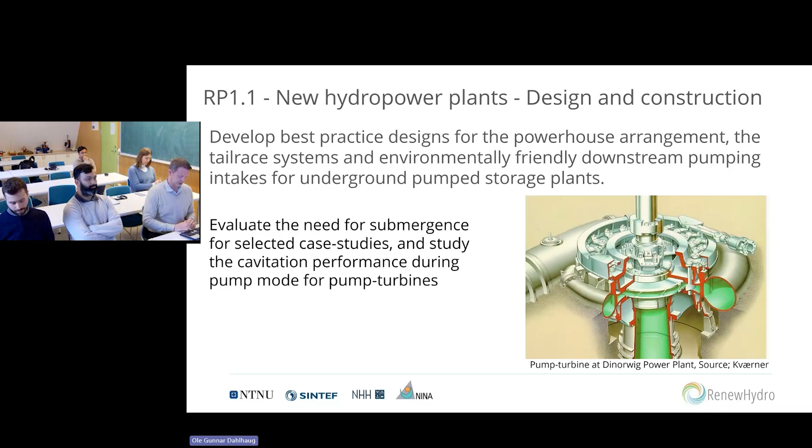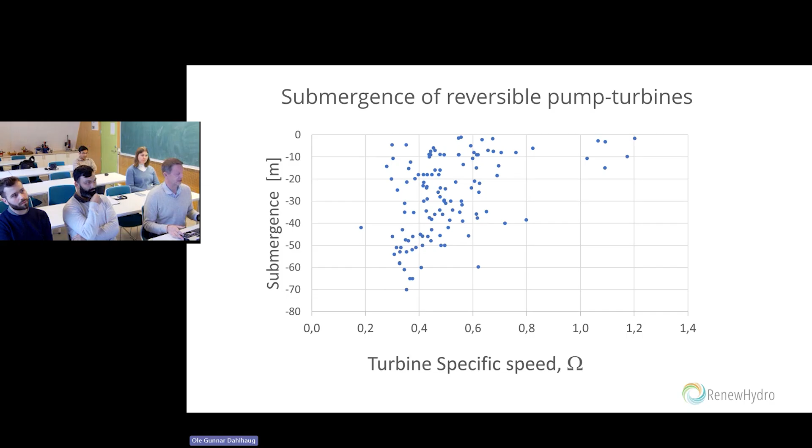That's a big question. Here to give you an introduction, these are different pump turbines around the world with different submergence. You see submergence down to 70 meters being utilized today, from just a few meters down to 70 meters. New pump turbines are coming with fairly large submergence, and if we can reduce that submergence, the cost will also be reduced quite a lot.

We are looking into the Sira Kvina Hydropower system and Tonstad as a case study. Tonstad, or Sira Kvina, is going to look into the possibility of building a new pump turbine from Sirdalsvatn up to Gravatn, with a fairly large power output. This is one of the cases we will look into in this project, and it's great that they are giving us all the information from that power plant. It's a nice thing being in RenewHydro that can give us access to data about these things.

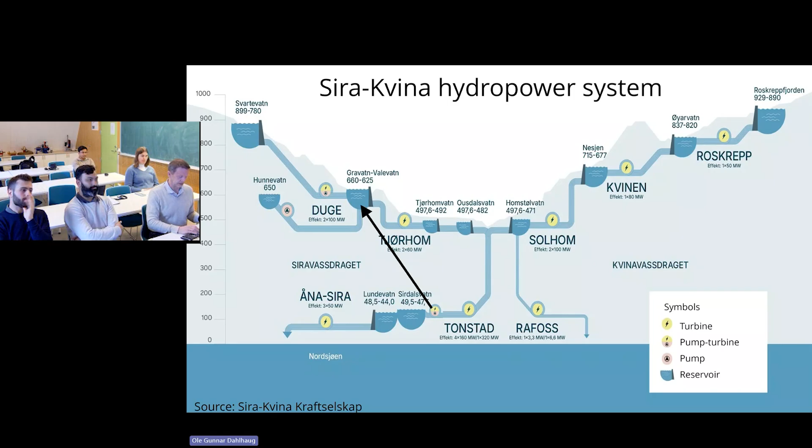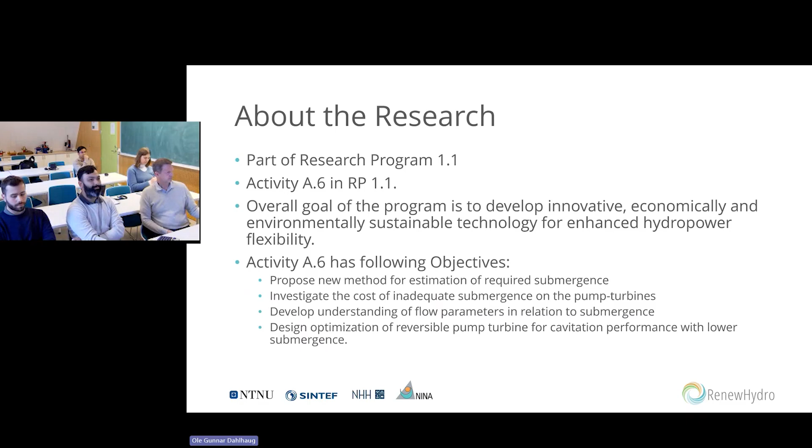Hello, I'm Amul Ghimire. I'm a PhD candidate here, as Ula introduced, and I am working on the topic of submergence of reversible pump turbines. This is, as already introduced, under research program 1.1, activity A6 within that research program. The main objective is to find the possibilities for reducing submergence of reversible pump turbines. I will be talking about what this means and how it is a big topic right now.

First we have to talk a little bit about cavitation, basically defining it. It's a way of when water changes its phase from liquid to vapor because of a drop in pressure at a given temperature, then we can call it cavitation. It is not a new topic, it's been around for many years. It was first coined by Froude, who found it on ship propellers, and it was in 1895 that it was first introduced to the world, and it's still a big problem in hydraulic machines in daily operations.

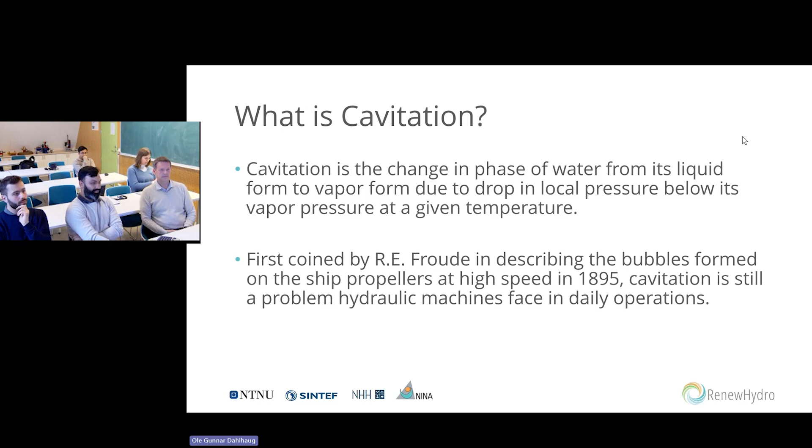To define it and understand it a bit more, we have to understand the boiling of water, because cavitation is basically boiling of water at room temperature. When you are boiling water at sea level, where the pressure is 1 atmospheric pressure, around 100 kilopascals, you boil water at around 100 degrees Celsius. But if you go up several hundred meters into the mountains, the water will start boiling at much lower temperatures.

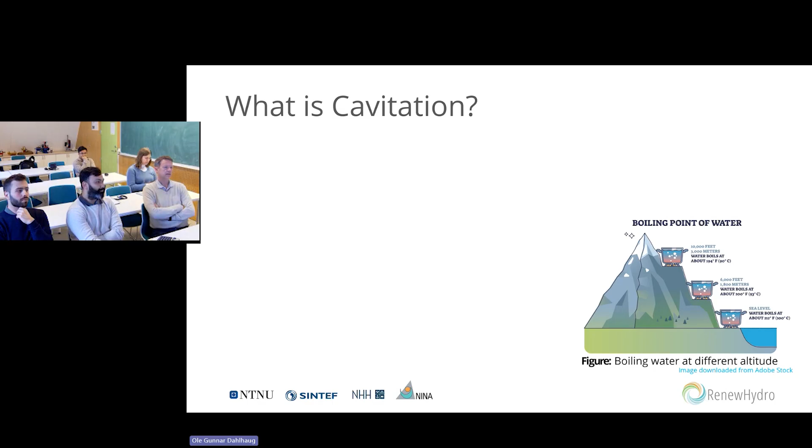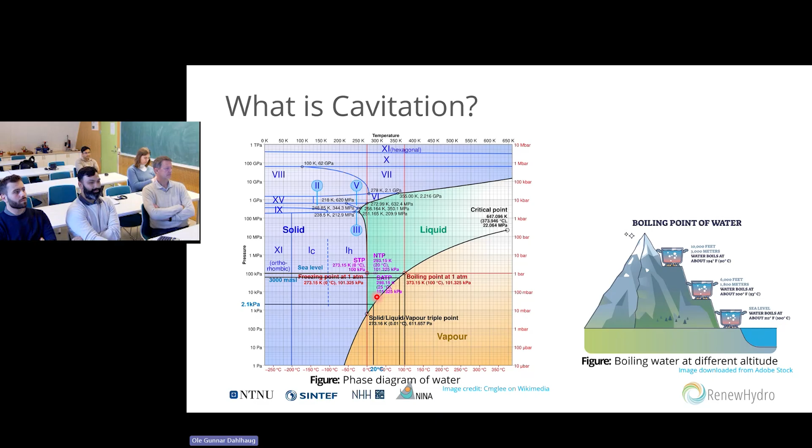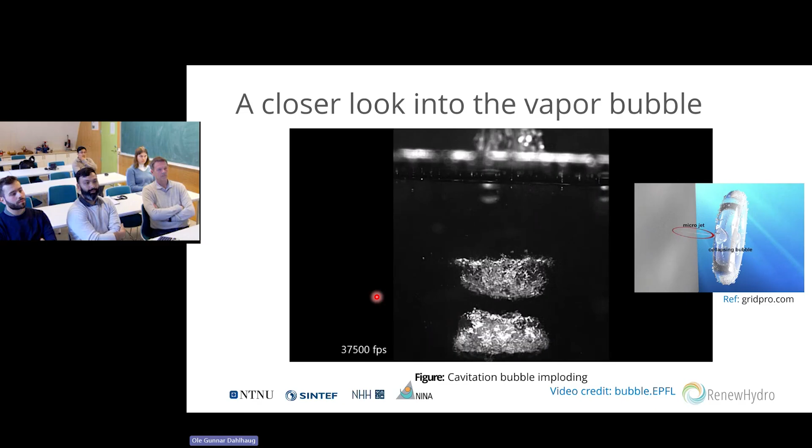So it's both the jet and the shock waves that hit your surfaces. In our case, it's the turbine surface, blade surfaces, which causes damage to the turbines, which is why cavitation is something we need to consider while designing.

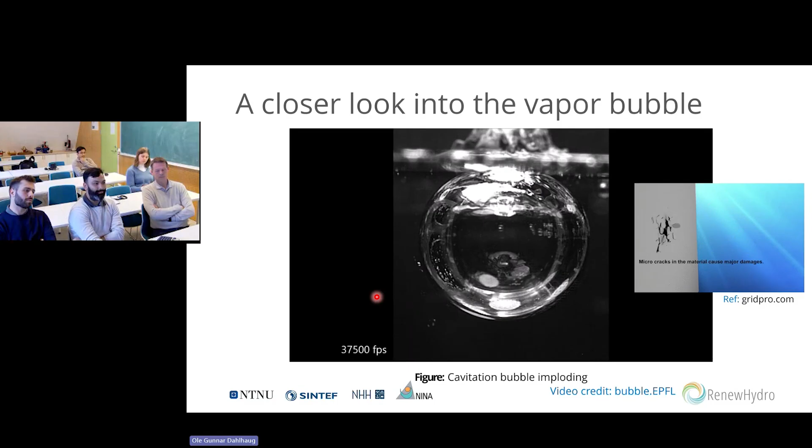Going into the turbines now, cavitation happens when the pressure is very low. In a turbine, the pressure can go very low when the flow is disturbed and when there is flow separation, and flow separation happens when there are obstructions on the flow.

It's all right, yeah. So we will look at this later as well.

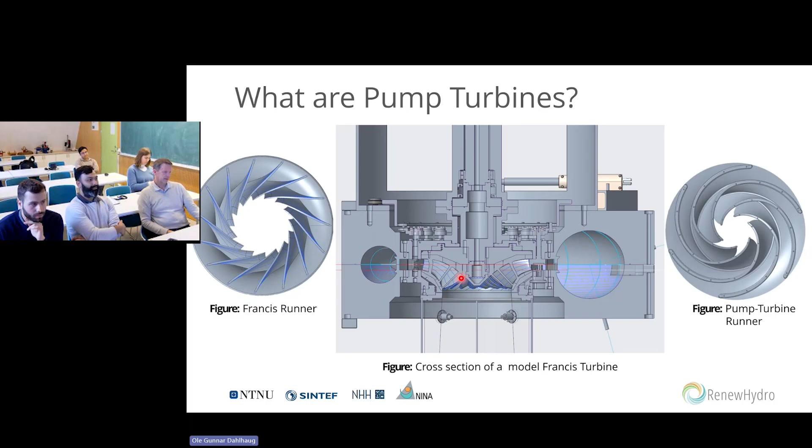Now going into pump turbines: these are basically just Francis turbines, which have a runner that looks more like a pump, and it's designed to operate both as a pump and as a turbine, such that it can pump water back up to its upper reservoir. For example, if you were to operate the Francis turbine as a pump, it will pump up water, but not all the way up to the same height that you would actually want your upper reservoir level to be.

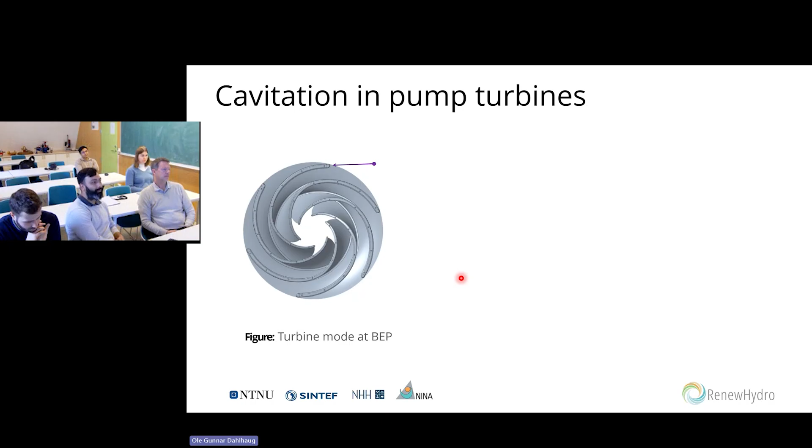Talking about cavitation - I couldn't show you a video before, but what happens is at the best efficiency point in turbine mode, the relative velocity of the water flows aligned with the shape of the blade at the inlet. If, for example, we're looking at high flow, this relative velocity will not be aligned in the same way, and it will be hitting the blade a bit offset. Because of this, you'll see flow separation on the opposite side of the blade.

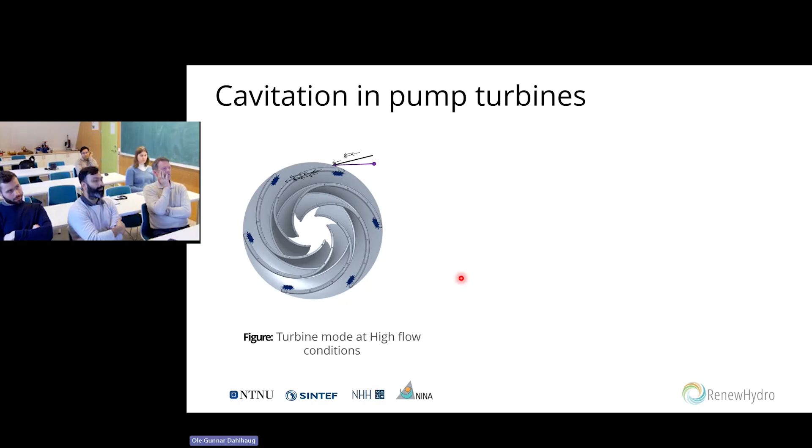And when there is flow separation, there is a pressure drop, and when there is a pressure drop, there is a possibility you could go into the cavitation region of water at that temperature. We did this test in the lab and saw that when operating at a low enough head and with really low suction pressure at the suction side, we cavitated at the inlet of the turbine itself in turbine mode.

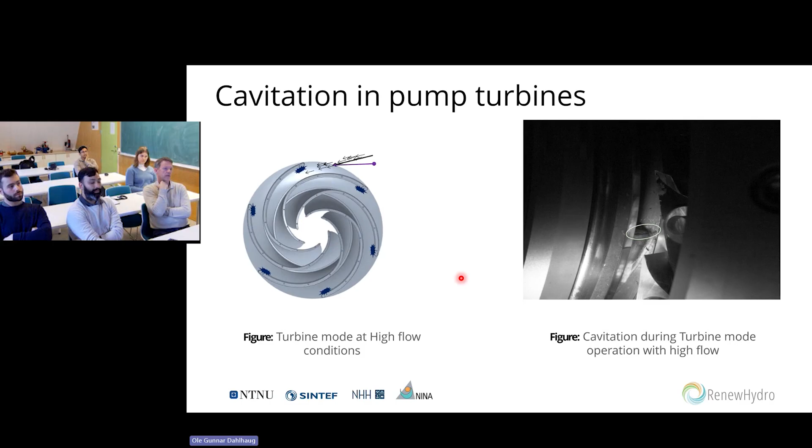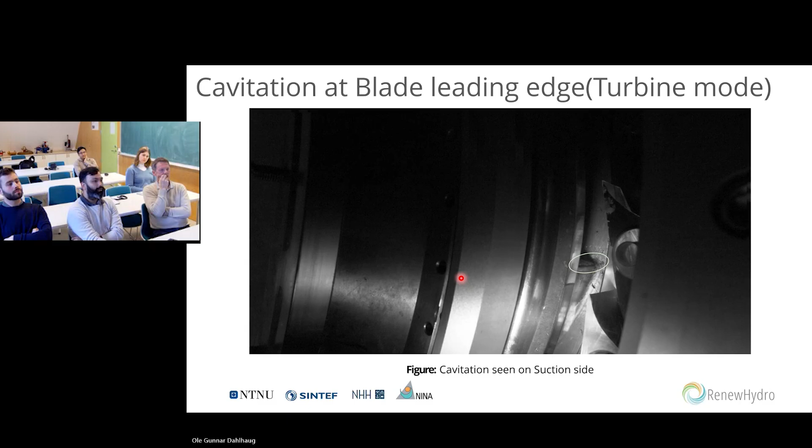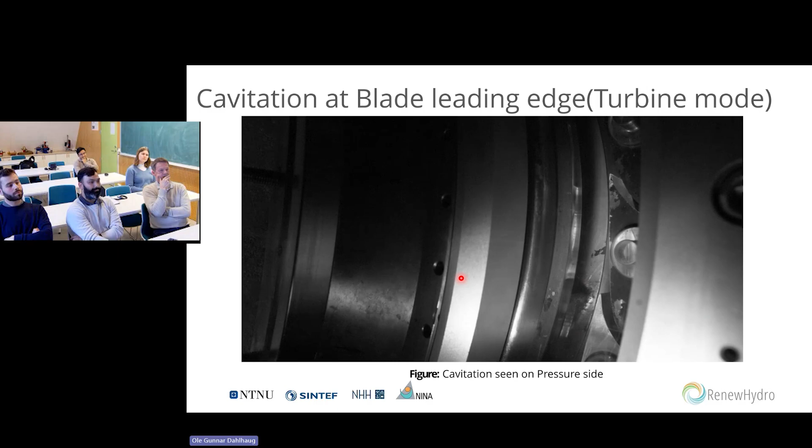You can also see this on the video. This is the suction side of the blade being cavitated when we're operating at low flow or part load. And again - sorry, that was full load - this is part load, where you see the cavitation occurring at the high pressure side of the leading edge, right here.

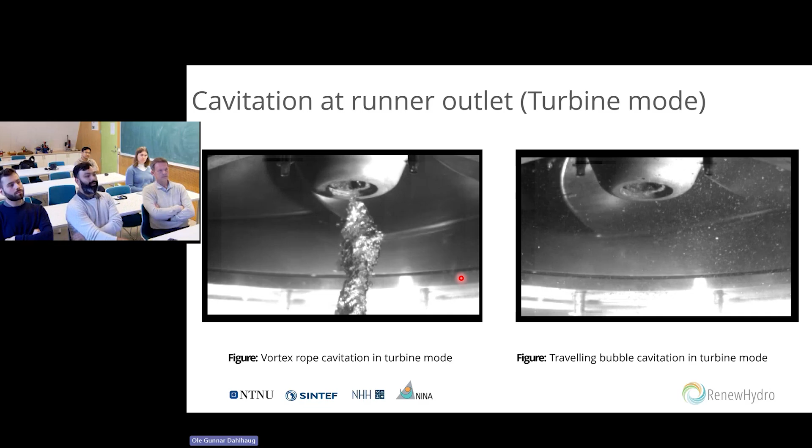Looking at this, it doesn't look like much because these are much better operating conditions. But if you go much deeper into the off-design conditions, you see this - it's only cavitation in there, and this is accompanied by lots of vibrations during operation, and possibly damage if we continue running it for a long time.

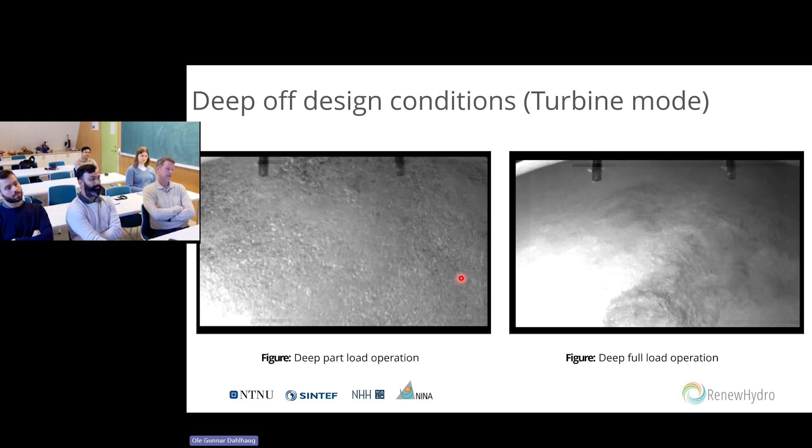Now looking at pump mode operation. Pump mode operation is nothing but rotating the pump turbine runner in the opposite direction of the turbine. At the best efficiency point, the relative velocity, same as before, should be in the same direction or aligned to the shape of the blade.

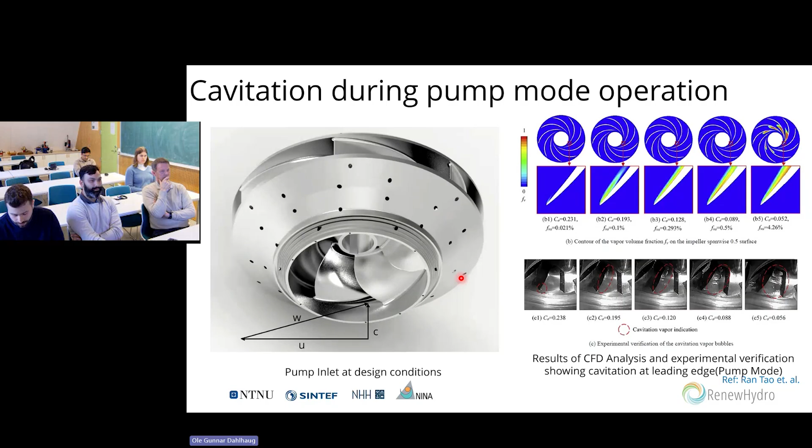As soon as there are any differences in this alignment, we see that flow starts separating, and it's much easier to see cavitation at this point - at the inlet of pump turbines - because the whole region in that area is at really low pressure unless you pressurize it.

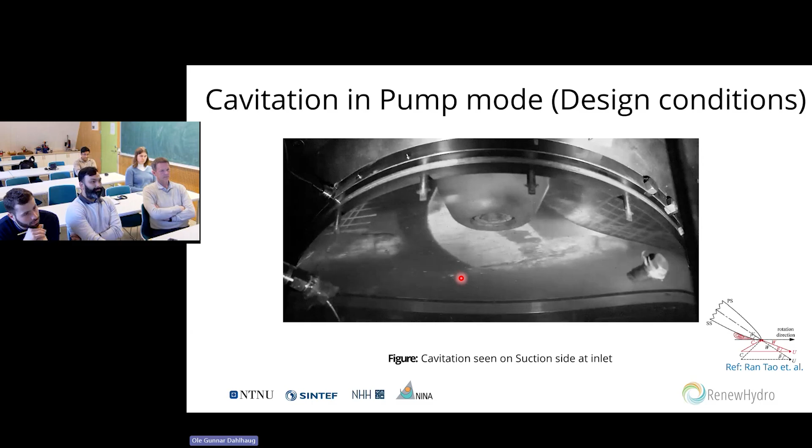So this was at design conditions. Actually, what happened was we reduced the pressure so low that we saw cavitation at design conditions. I said that if the flow conditions are aligned to the shape of the blade, we should not see flow separations. But because of the thickness of the blades itself, we cannot have infinitely thin blades. So as soon as there is some thickness, it's an obstruction for the flow, and that causes some flow separation, causing these kinds of cavitations.

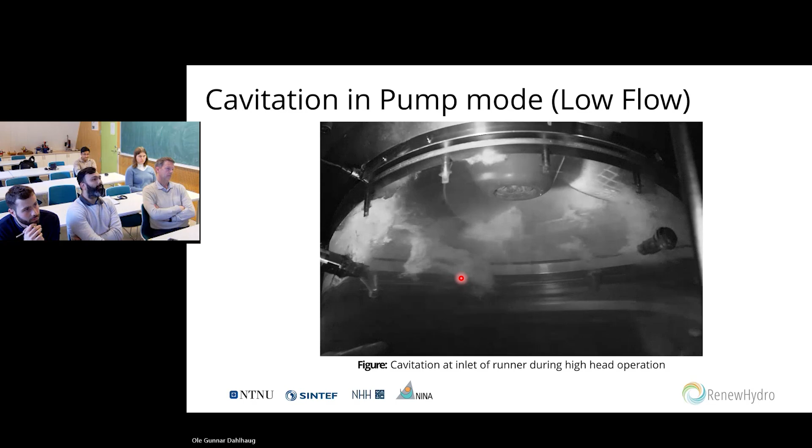As soon as we lower the flow, this is when your upper reservoir is quite filled up, close to your higher regulation level, and you're still pumping up water. So this is what could happen in your pump turbine in pumping mode. This is low flow and high head operating conditions, and it's also accompanied by lots of noise from cavitation as well as vibrations.

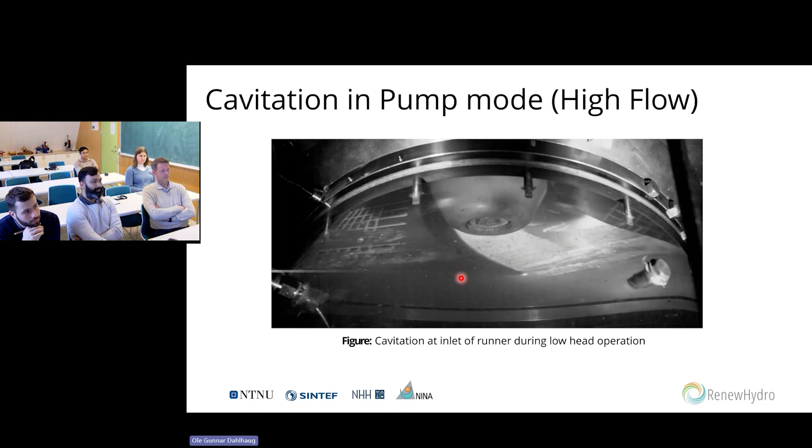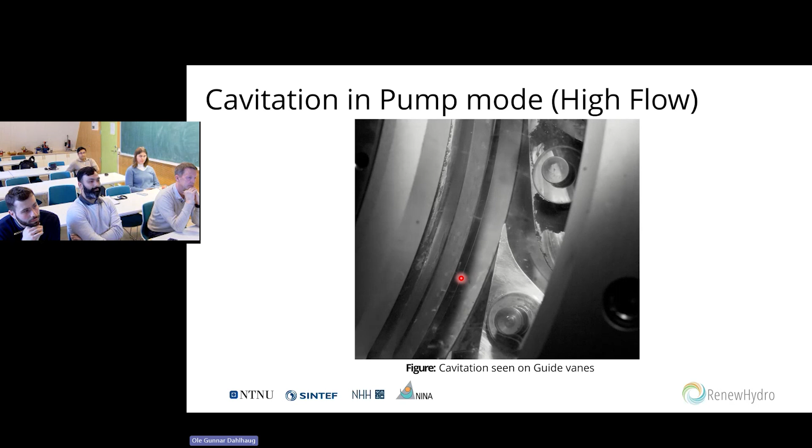While this is at high flow, when you have less water in your upper reservoir and you're pumping more water through your pump turbine runner, you see cavitation here, and it doesn't look much more damaging than it is there. But if you look at the other side, at the outlet of the pump mode at the guide vane, you would see this kind of cavitation.

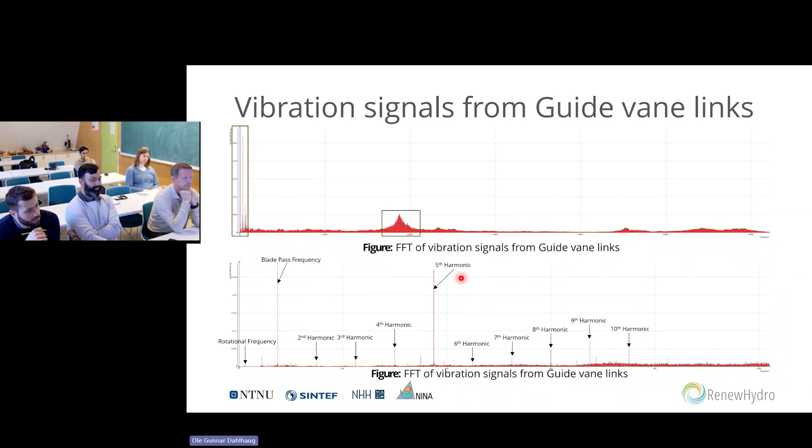But we could also clearly see the rotational frequency here, and then the blade pass frequency. Each time the blade passes the guide vane there is a peak, and many different multiple harmonics of that were also seen. If you were here during this test, you could hear that the sound coming from this turbine sounded more like a turboprop propeller when it was running.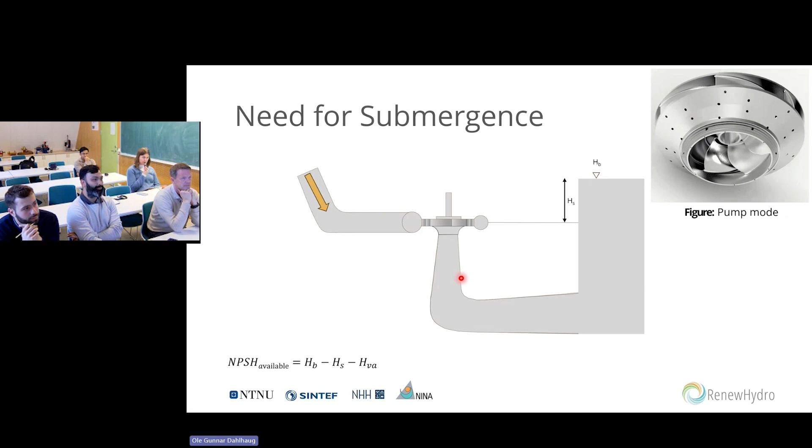So in order to reduce this, to avoid cavitation, the method is to increase the pressure at the inlet of the pump mode. To do that, we need to submerge the turbines quite deep, as Ole already mentioned before. Submerging this deep means a lot of investment requirement, we need to spend a lot of money, and technically it needs to be very sound to be able to submerge everything so deep into the mountains.

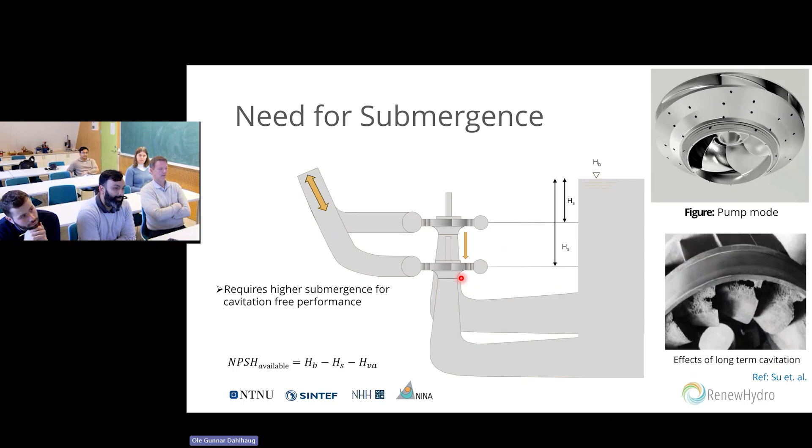So it is a challenge to submerge it, which is why we are working on this topic, trying to reduce submergence. To be able to understand and reduce that, first we have to be able to predict what would be the requirement of a pump turbine to be submerged, which is predicting required NPSH, which is another way of saying submergence, as it's one component in calculating NPSH.

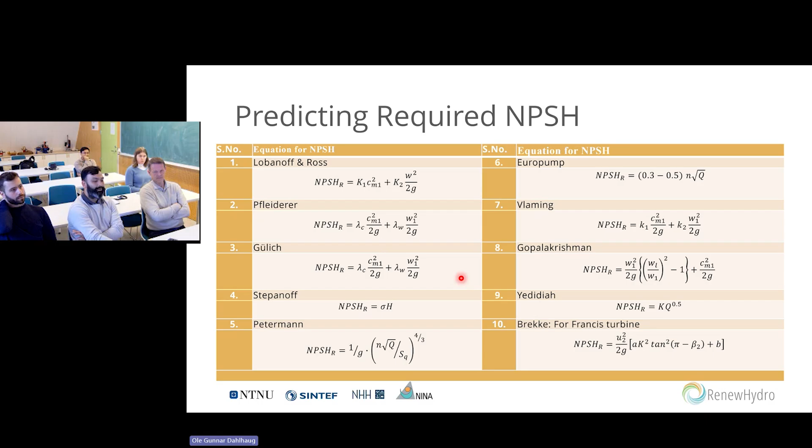There are many different ways the literature suggests this can be calculated, and these are all the methods available out there. We don't know if any or all of them could work in our case, which is why we are doing this ourselves using experiments.

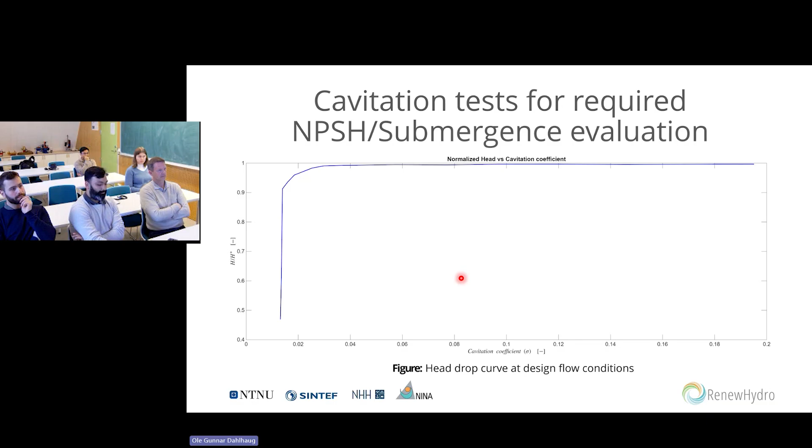What we see is that as we decrease NPSH or the Thoma cavitation number, the head drop starts quite late, at very low pressures. So this is at 3% head drop, and the cavitation is very high. We would not want our pump turbines to be operating at this point.

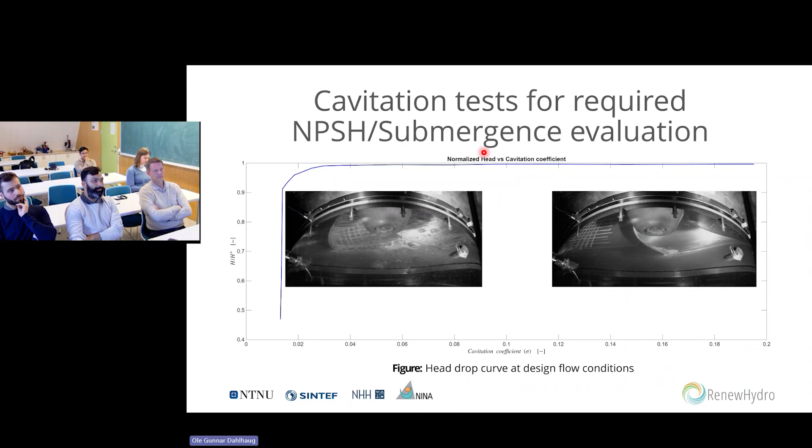This is when you have submergence equivalent to nothing, equal to the level of the tail race, for a 500-meter project scaled up from our pump turbine. But if you look at a 0.2 Thoma coefficient number, equivalent to 90 meters of submergence for a 500-meter project, we still see some cavitation, and our target is to find a location somewhere in between where we won't be cavitating so much that the damage is uncontrollable.

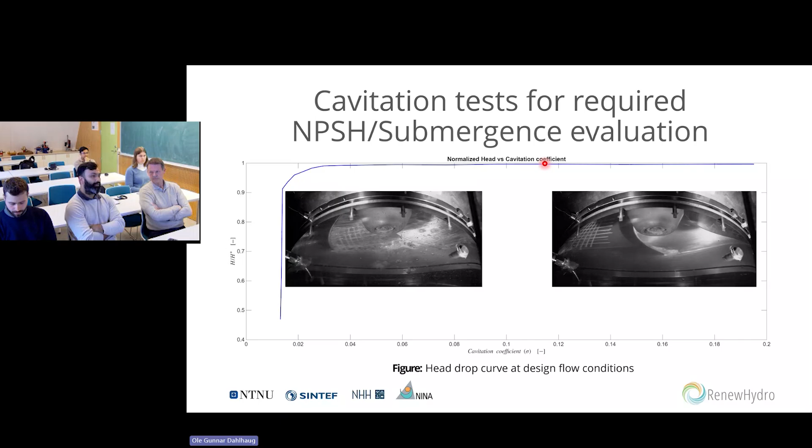That is what we are currently working on: finding a way to determine how much damage it could cause, or how long we can operate with some level of cavitation, by reducing the submergence.

Apart from that, we are also working on creating a numerical model for predicting or simulating cavitation in our original pump turbine design, which is quite close to what we have seen in the experiments right now. We will continue exploring this and then start making changes in the designs to optimize them to reduce cavitation while working within the same level of submergence that we are seeing cavitation in our current design.

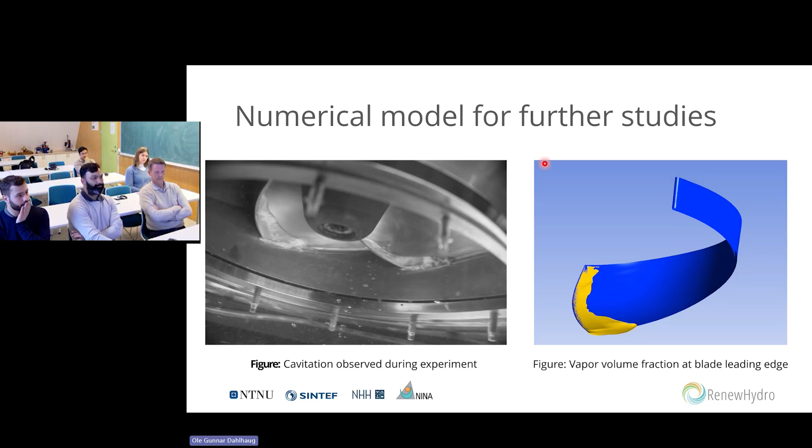We have done lots of experiments right now, and I think I have more than enough data to be trapped in my cave for several months, analyzing them. We will continue exploring everything, the videos as well as vibration data and other performance data we have, and find explanations for different cavitation behaviors, comparing them with numerical results. Afterwards, we are planning to make modifications in design using optimization techniques and validate them using experiments in the near future.

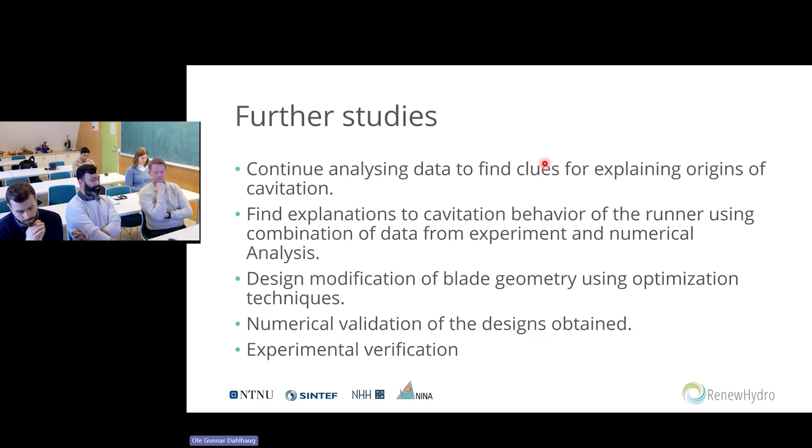We'll just dive into the next project and talk about high ramping flexible operation. What we're doing in the water power lab in this project is to actually look at the possibility of defining the cost of flexibility. And the only way we can address that question is actually to look at the materials.

If you look at the fatigue on the materials, we are able to actually say something about reduced lifetime. And if you can do an estimate of the reduced lifetime, we can say something about the cost. This is exactly what we're trying to address.

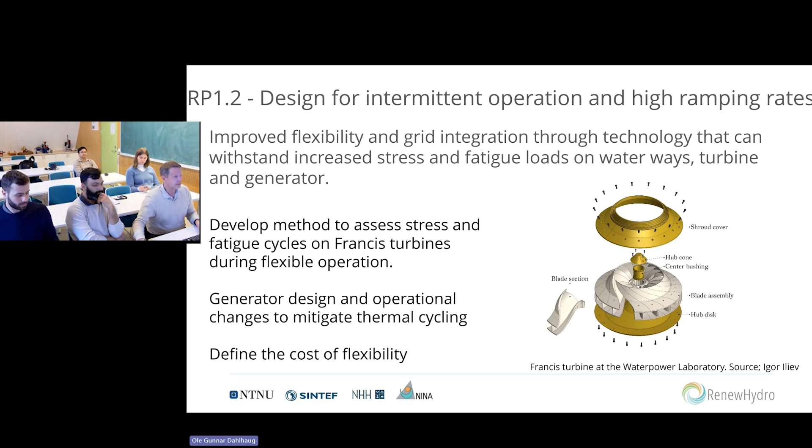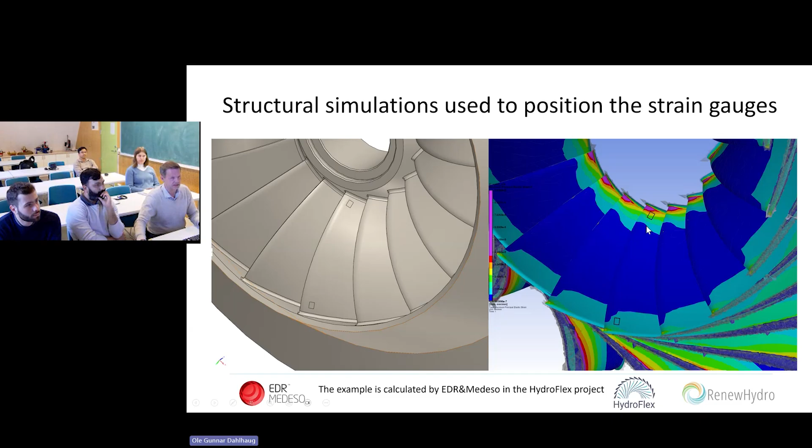For example, just to show you some tests that has been going on earlier here, Johannes Kverno did strain gauges, put them into the turbine runner, and then did FEM calculations to find out what was actually going on. Then he did measurements in the lab and found out that for this runner, the stresses were very high on low loads, while on high loads it was a lot less. We believe this is dependent on the speed number and also maybe a little bit on the design.

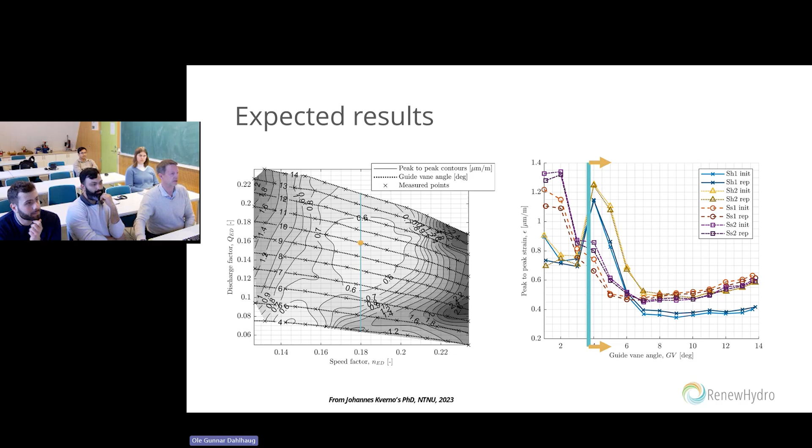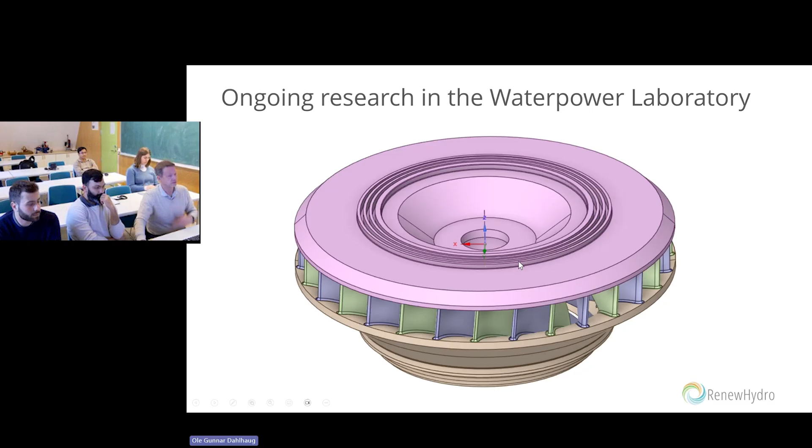So we are going to go more deep into this question. Right now, there are three students, one PhD, Francesco, who is going to present here, and two or three master students, working on this runner, which has been utilized for a lot of research in our lab. They have been doing FEM analysis on it, and they have done an initial test.

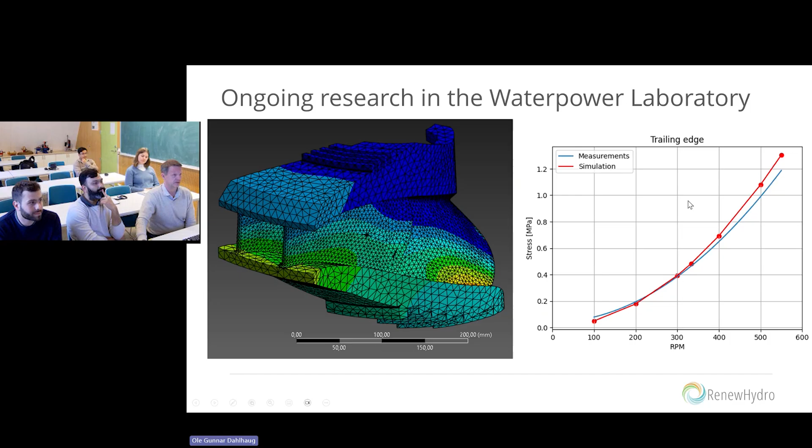The first test they did was spot on between measurements and simulations. They were very happy about it. We are still looking into the uncertainty of it, but again, first test, first trial, and we are very happy about it. So it's nice to see they're going on.

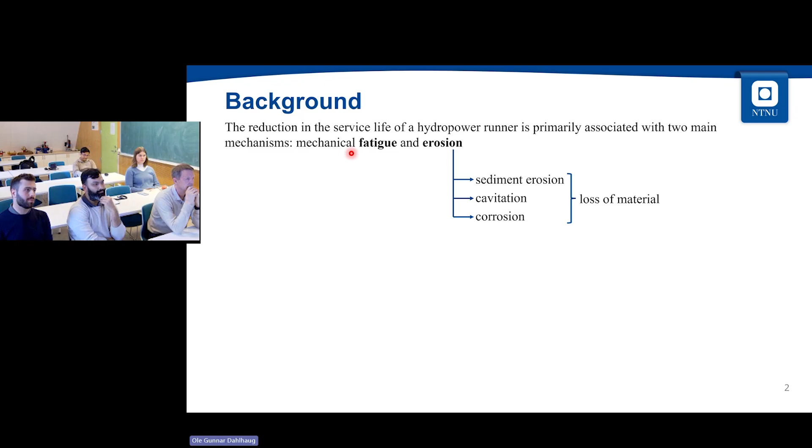On the other side, we have mechanical fatigue. Usually, at least in Norway, erosion, or at least sediment erosion, is not too big an issue, while mechanical fatigue tends to be more important from this point of view. So we can say that mechanical fatigue is the progressive and cumulative damage of a material caused by variable loading. The important thing to understand is that this variable loading can lead to failure at stress levels that are significantly lower than critical design stress.

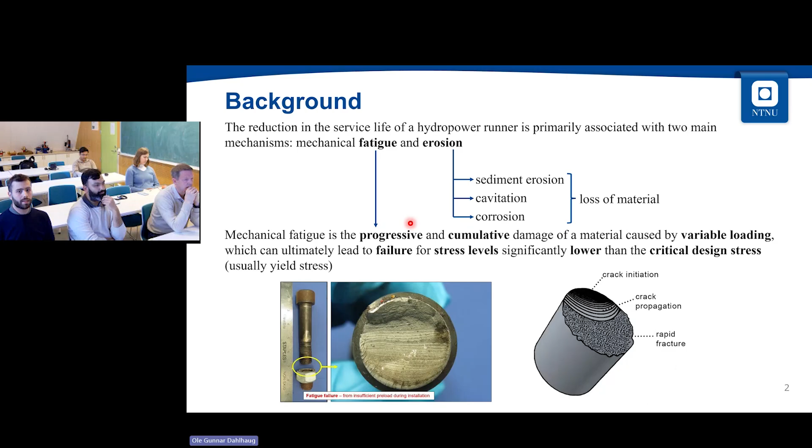What you can say if you look very close to your component is that when it is subjected to loads that change over time, at a certain point you will have initiation of a crack, usually starting from defects inside the material. This crack will propagate driven by the change in stress over time, cutting through your component until the remaining cross section is no longer enough to withstand the load, even if this load is way lower than the critical load used for the design. So your component breaks and fails in a very fragile way.

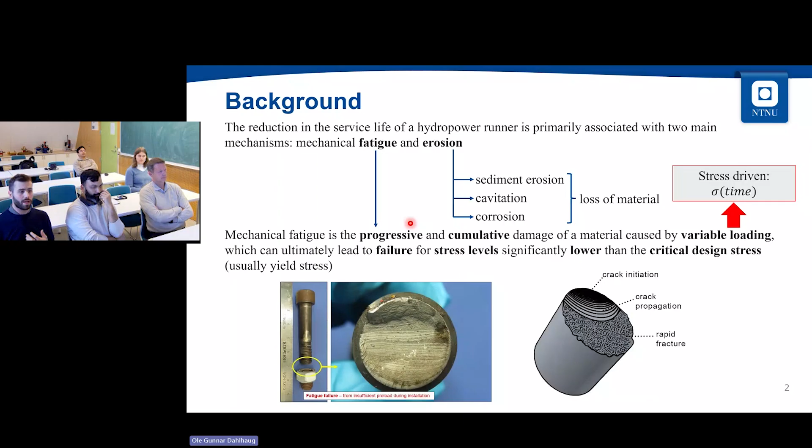So it's a very complex and dangerous type of failure, because your component will fail at a stress level that is considered safe during the design phase.

So why is fatigue relevant to hydropower? Mainly because it reduces the useful life of all components subjected to variable loading. It has an effect on civil structures too, but I'll focus more on the runner itself. The important thing to understand for the runner is that even when it's operating at the design condition, in steady state operation for the design flow and head, it is still subjected to variable loading.

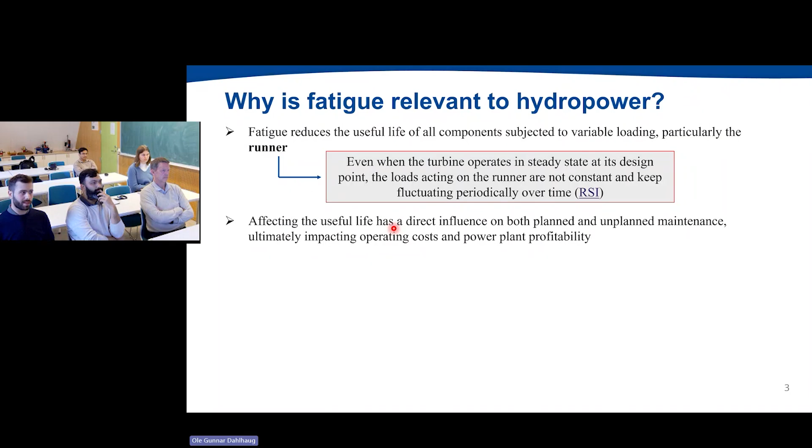In the best case, this load changes periodically, due to pressure fluctuations or rotor-stator interaction. So runners, when operating, are always subjected to variable loading and always subjected to fatigue, and this affects the useful life. Affecting the useful life of the runner means affecting the cost of maintenance, because I could have unplanned maintenance, and in general the life of my runner degrades in a way I was not expecting.

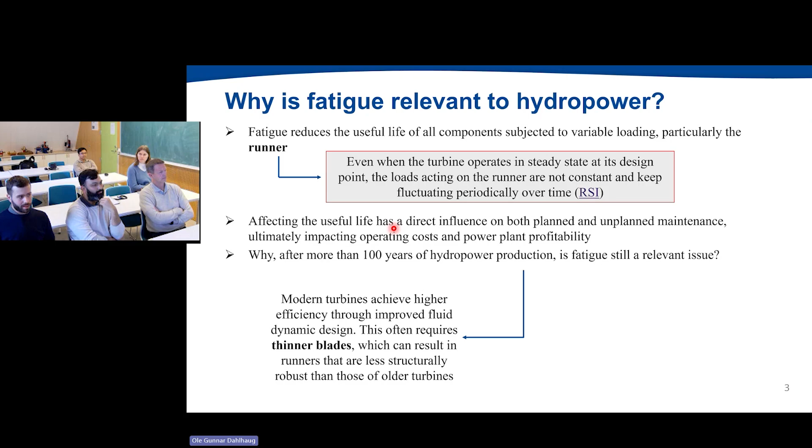So another question is, why after more than 100 years of hydropower production is fatigue still a relevant issue? The answer is double, I would say. On one side, modern turbines can achieve higher efficiencies because of better fluid dynamic design. But to reach this higher efficiency, they require thinner blades, and thinner blades are less structurally robust compared to the bigger blades used in the past.

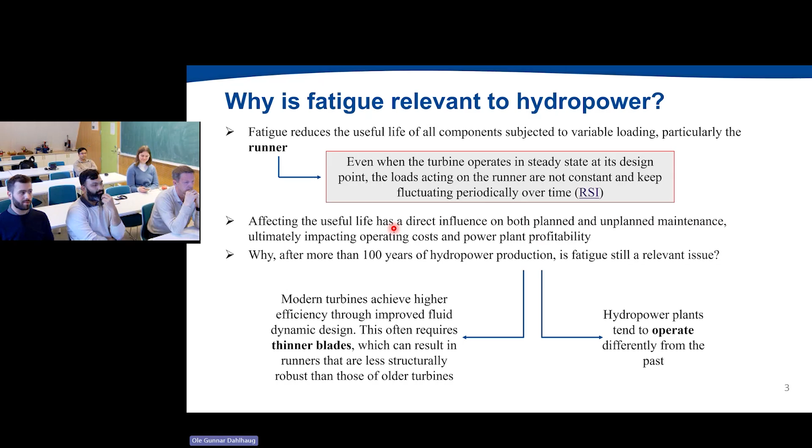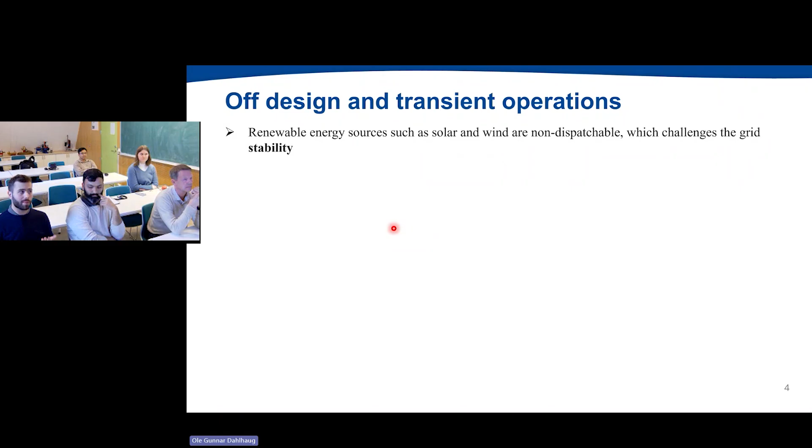The other reason is that hydropower plants tend to be operated differently now than in the past, because of renewable energy sources in the grid, especially non-dispatchable ones like solar and wind. These sources challenge grid stability because we cannot control, or it's hard to control, when they produce energy and when they don't. To have a stable grid, we need to balance power production and demand at every moment, and hydropower is the most suitable technology for balancing the grid. So the way we use hydropower has shifted from mainly base load in the past to balancing the grid nowadays.

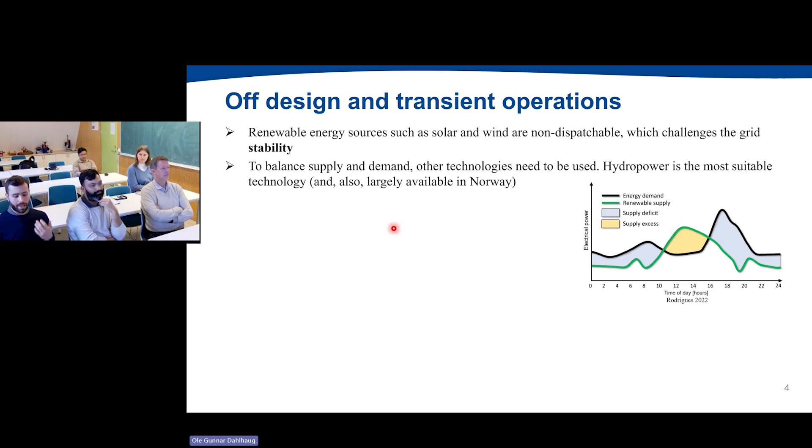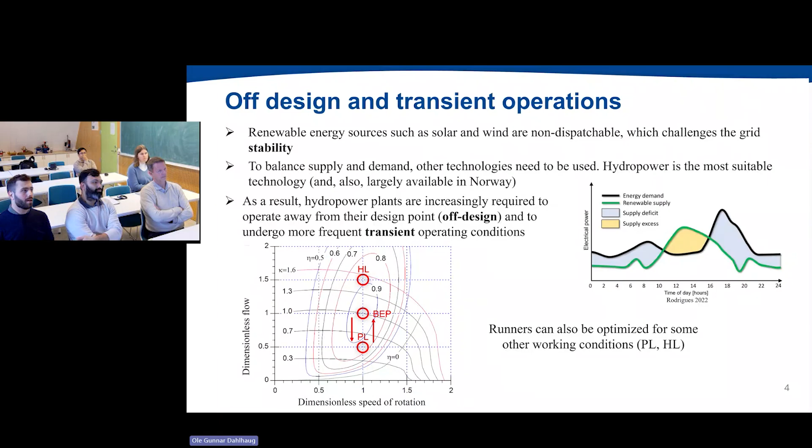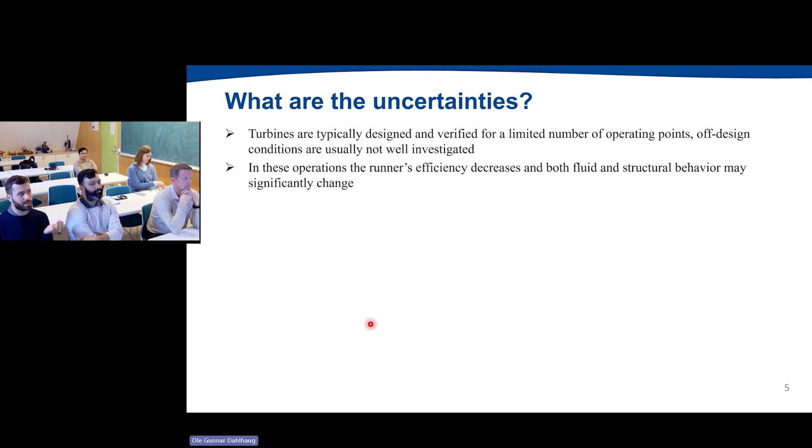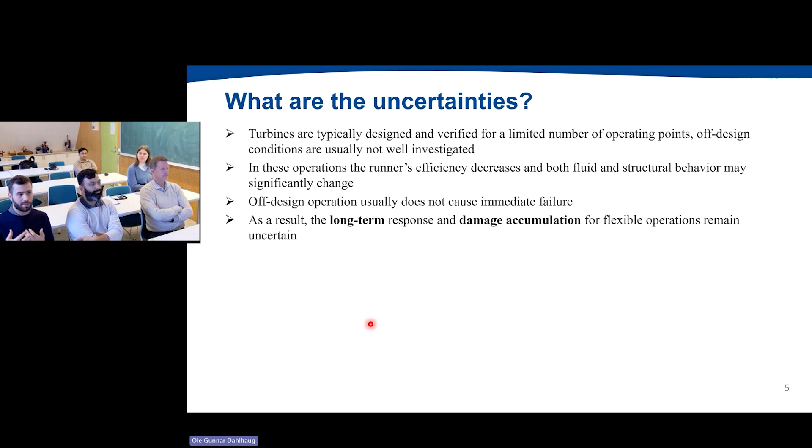So what is the problem with running in off-design and transient operation? The main problem is uncertainty, because typically runners are designed and verified for a limited number of operating points, usually only one, and off-design conditions are generally not well investigated or not investigated at all. This means not only that the runner's efficiency is lower outside the design operating condition, but also that the fluid dynamic and structural behavior of the runner is not well known and can significantly change from the design conditions. As a result, in the long term, we don't know the response and damage accumulation of the runner to flexible operation.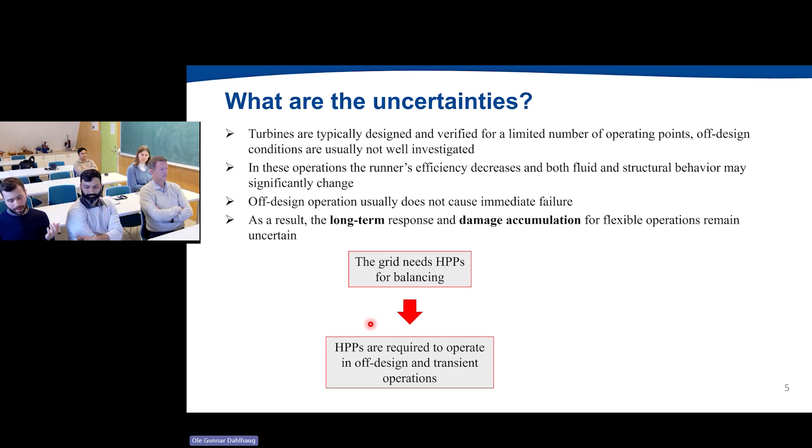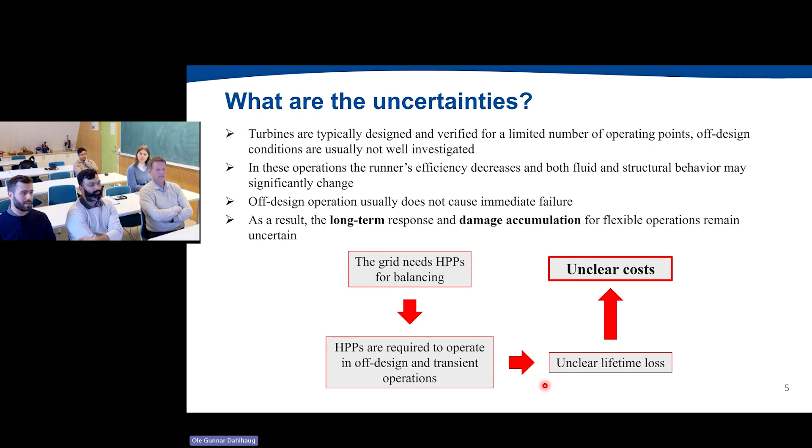So to summarize, the problem is that grids need hydropower plants to balance them, and as a result hydropower plants are required to operate more often in off-design and transient operations. This leads to unclear lifetime loss, because we don't know the real damage phenomenon or are not able to quantify it correctly, and this leads mostly to unclear costs of maintenance.

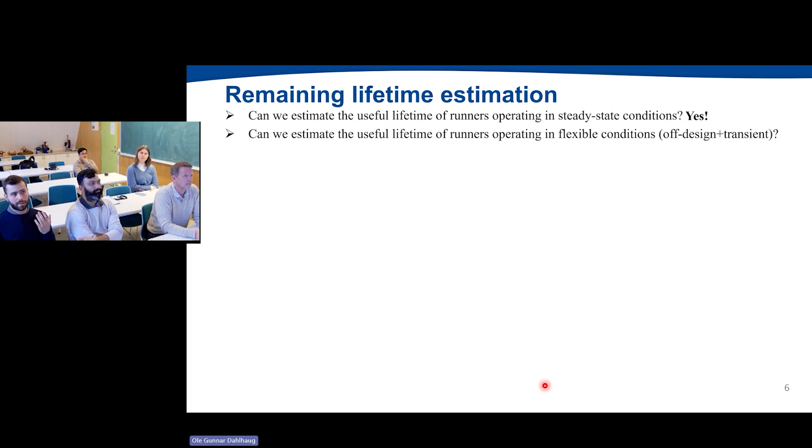So what is already available? What can we already do with the knowledge that we have? Can we estimate the useful lifetime of a runner in steady state operation? Usually, yes, it's not easy, but it's possible. Is it possible to estimate the lifetime in flexible operating conditions? Only partially, and with very coarse precision. So more no than yes.

There are two main existing approaches. One is on-site, based on strain gauge measurements, and one is numerical. They both have some pros and cons. Measurements made on-site with strain gauges can only be done for discrete locations on the runner, and they are usually very complex and costly. The problem with using this result is that they are not very precise in general.

The numerical approach can potentially be much more accurate, but it's usually coupled with the standard global SN or fatigue approach, which leads to limited overall accuracy, and it can be very computationally expensive. Also, the geometry of the runner must be known, which power plant owners most of the time don't have.

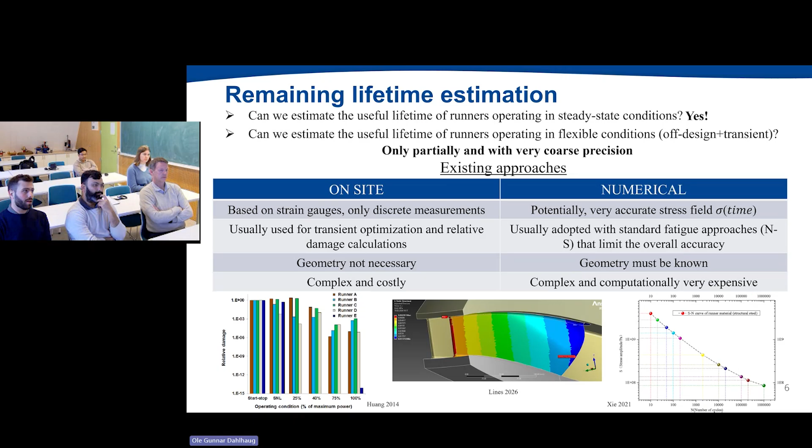So what is my research approach and what am I trying to do? I'm trying to improve the lifetime estimation of Francis runners during flexible operations. How am I trying to do that? First, I'm trying to combine the two approaches. So I'm using the Francis 99 reference model that Ole Gunnar talked about, which we have available both as geometry and as an experimental model that I can test in the lab.

I'm running both experiments and simulations to try to validate the results of my simulation, to obtain a high resolution and verified stress field. When we are able to see how this stress field is, we can, for example, assess potential simplifications of the stress field, and eventually, if they exist, identify correlations with, for example, pressure, which we can more easily measure around the power plant.

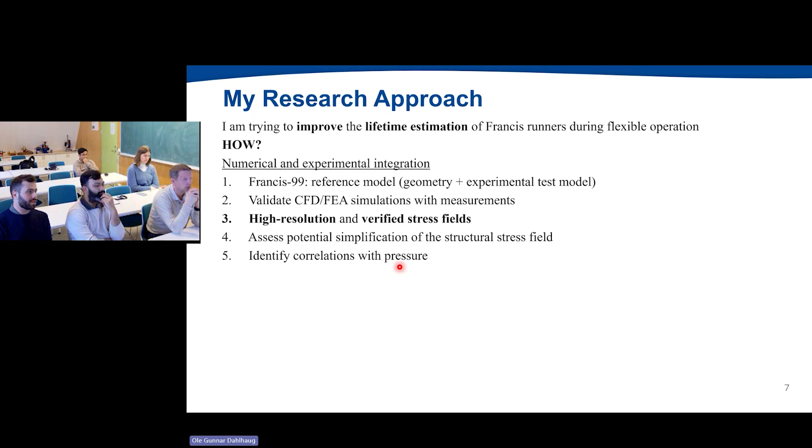And after that, what I'm trying to do is adopt a crack growth based fatigue model. Nowadays, the fatigue approach used to evaluate the fatigue life of a runner is usually the standard global approach based on the SN curve. I want to try to move beyond this approach and use linear elastic fracture mechanics, which will allow me to define a critical crack length. So what is the maximum length of a crack on the blade that the runner can tolerate to operate safely?

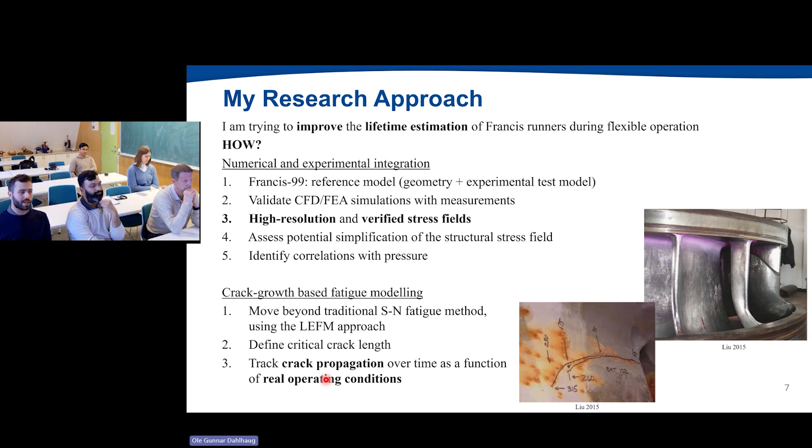And then the ultimate goal would be to try to track the crack propagation over time as a function of real operating conditions. So what could be the impact of this research for the industry? Well, for hydropower plant owners, it means basically better estimation of the degradation of the runner, and so the remaining lifetime, and this means better operational decisions that can be based on real maintenance costs and improved planning of maintenance.

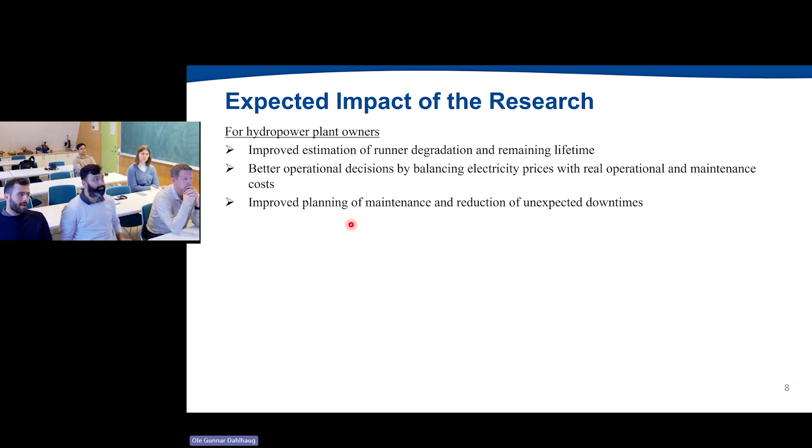And for turbine manufacturers, the benefit could be a validated methodology for numerical simulation of off-design and transient operation. Being able to track the crack growth over time for different operating conditions means that turbine manufacturers could have the ability to design and certify turbines not only for certain operating conditions, but for example for flexible operations. So we could have, for example, heavy duty turbines designed on purpose to work this way, where the damage caused during operations is minimized.